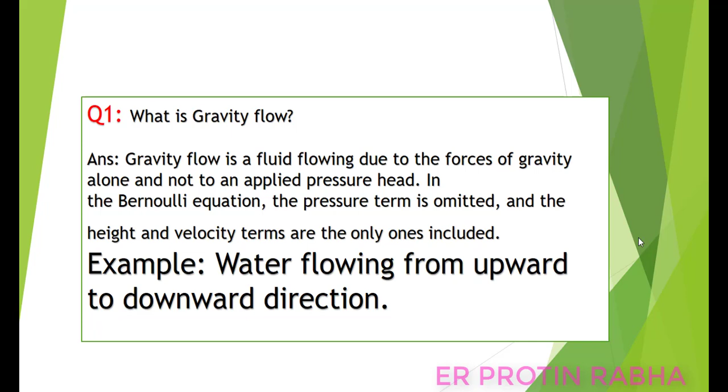So let's see the next question, which is about stress. Most students or professionals tend to easily forget these stress terms, but it is very important to remember and very important in our field. So the next question may be on stress.

The question may be like this: what is the difference between engineering stress and true stress? I have already written the answer here, so you can read it and try to understand, because this is a long answer and I don't like to make my video too lengthy. If I explain this answer, the video length will be very long, so it's easy, you can understand from the answer yourself. I will just try to cover the short and easy part, since explaining it fully would take lots of time, but I leave it up to you to understand, because you need to work it out by yourself too.

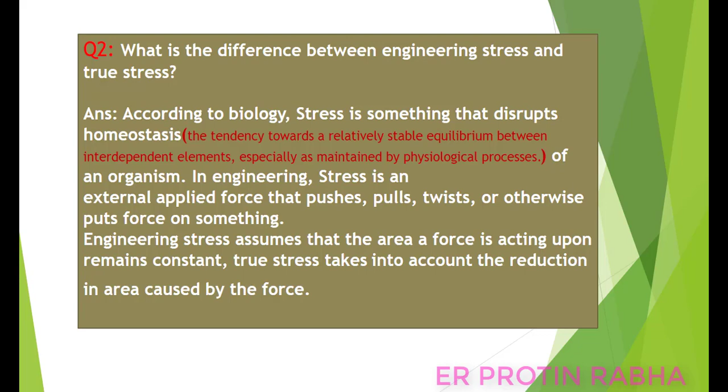So let us move to the next question. The next question may be, what is a kip? It's actually a unit, an imperial unit, mostly used by Americans. In our Indian and British standard, we use metric units, meaning units like mm, centimeter and meter for measuring. Imperial units are like feet, inches and all. So what is a kip? The answer is, it is an imperial unit of force, it equals 1000 pounds force, used primarily by American architects and engineers to measure engineering loads. So very clear now, right? I hope you understood.

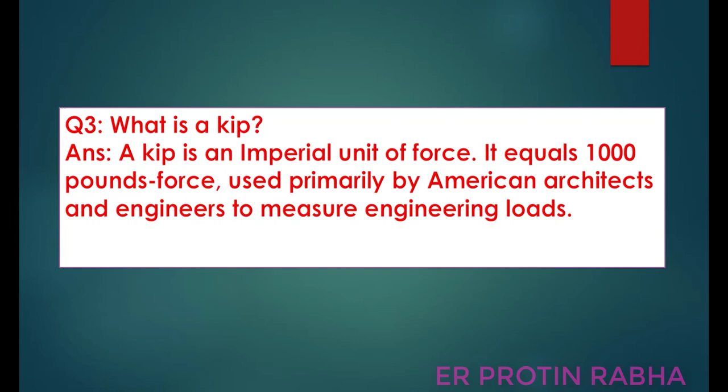Let's move on to the next question, regarding fatigue. The question may be asked like this: what are some structures that may be subjected to fatigue? I hope you understand what fatigue means; if not, please go back to basics and search what fatigue means in mechanics. The answer may be given like this: the following structures may be subjected to fatigue: number 1 is bridges, number 2 is hydraulic presses, and number 3 is burners trains. It's not that tough, you just need to name the structures subjected to fatigue: bridges, hydraulic presses, burner, etc.

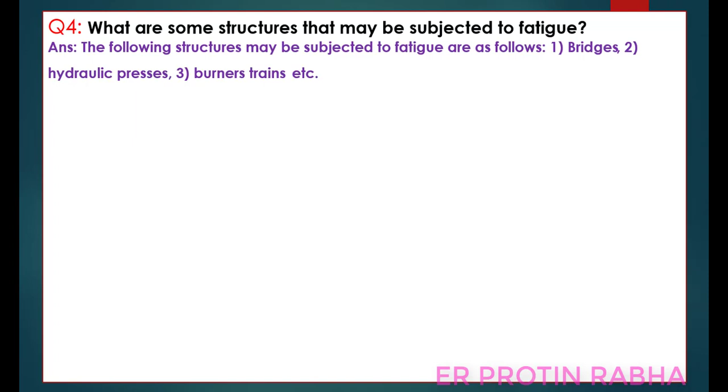So next let's move to the next question, which is very important and very frequently asked. You better try to understand and remember it. The question is, why does the pressure increase under soil? The answer is very simple and clear to understand. I will read out the answer for you: the soil pressure increases with the increase in depth due to the overburden or self-weight of the soil and due to loads. We mostly deal with loads of different materials, self-weight, something like that.

So soil pressure increases with the increase in depth; as the depth increases, the soil pressure also increases, due to the overburden or self-weight of the soil and due to the loads imposed upon the soil. So what are the loads imposed upon the soil? I hope all of you know that; if not, please try to find out what loads are imposed upon the soil. I will tell you a little bit: your dead weight means the dead load of the structure itself.

Okay, and like steel and all, and then live load may be there, like human being and all. Okay, those are live loads. So live load, self weight, dead loads - all those are imposed upon the soils. So we are talking about those kind of loads here.

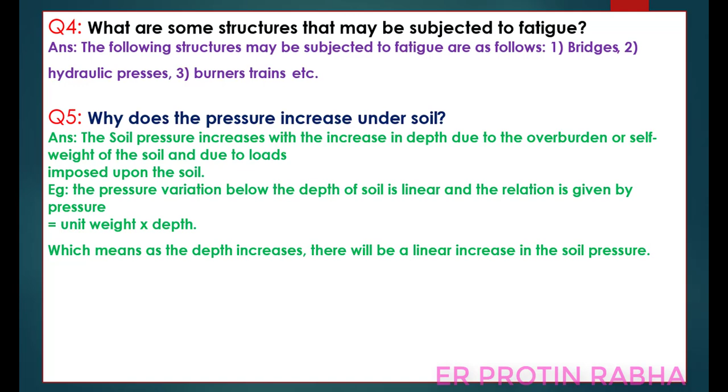Okay, so next question - sorry, part of the answer is still there. Continuing the example: pressure equals unit weight into depth, which means as the depth increases there will be a linear increase in the soil pressure. Okay, let's see the next question now.

Next question is: what is the purpose of the gap in the road on the bridge? The answer is like this - the purpose of the gap in the road is given to allow the road to expand and contract with changes in temperature without causing damage or deformation to the road.

See, it's very easy, and you know that one. That gap is like an expansion gap. In every structure we give expansion joints, right? So that gap is nothing but the expansion joint in a bridge. It is basically given to allow the bridge or structure to expand and contract without causing damage or deformation to the road.

So expansion and contraction - as a civil engineer we should know why it expands and why it contracts. Expansion of any structure may occur during summer season mostly, and contraction of the structure may take place during winter season, because it's very cold. It expands during summer season because it's very hot. So this gap is provided to allow the road to expand and contract with changes in temperature without causing damage or deformation to the road.

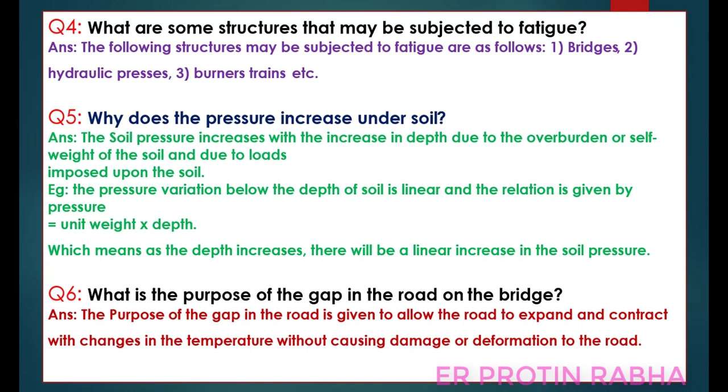Alright, let's move on to the next question. What are the reasons for geotechnical site investigations? This is very, very important - why do we do geotechnical site investigation? Before starting any project, it's very important to investigate the soil.

We need to find out the kind of soil present where you are going to construct a building or any structure, where you are going to do a new project. So before construction or before designing any structure, this geotechnical site investigation is a must. So what are the reasons? We're going to see that in this question number 7 - what are the reasons for geotechnical site investigations? Let's see what's next.

The reason for geotechnical site investigation is to know the soil properties. In doing so, be in a position to determine whether the particular site is suitable for the purpose intended, to know the history of the site, to know what remedies need to be put in place before construction can start based on the soil properties that can be determined on site and in the lab, and to design the appropriate foundation for a structure.

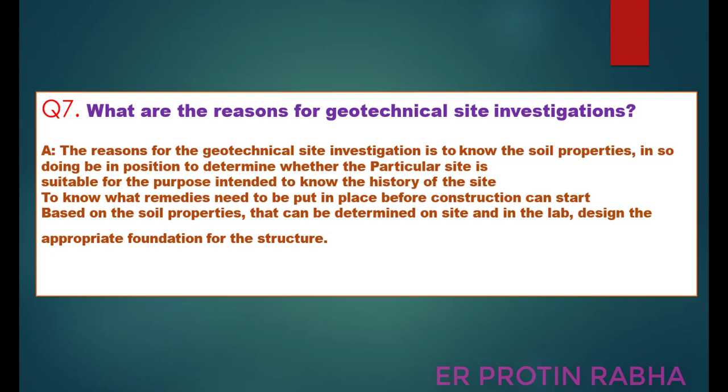Okay, question number 8: what do you mean by honeycomb in concrete? That's a very common question. I will just read out without making any long explanations. Honeycomb is a kind of construction defect while casting concrete. Sometimes people call it an air pocket in the concrete, or a void. Simple question and answer, please read yourself.

The next question is, what is a projection line? The answer is, projection line is the way in which the object is shown on a flat piece of paper. Very simple, one-liner question. Read and try to understand yourself.

Let us move to the next question. What is moment of inertia and its importance in civil engineering? Moment of inertia is very important, mostly in mechanical subjects and all, but it's also very important for us. So what is that? The moment of inertia measures the opposition any kind of body will have against a certain momentum along that same axis, trying to rotate that body. I hope you understood what that means.

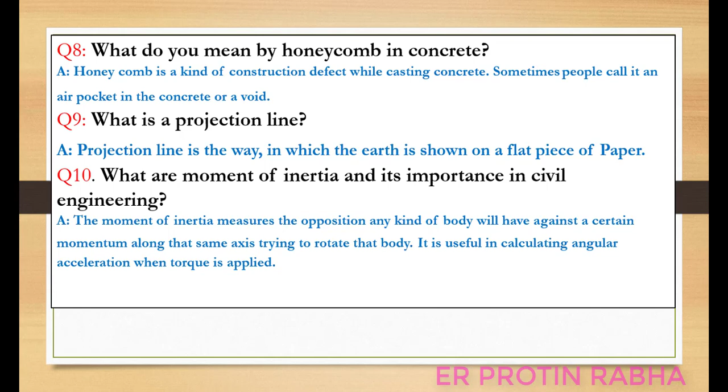Sleepers are of many types, according to material - it can be concrete sleeper or wooden sleeper. In earlier times, mostly wooden sleepers were used, but these days we use RCC.